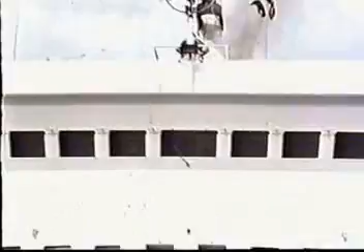These ships are the means of transportation of millions of people and goods of every kind between countries, and are therefore the lifeblood of trade between nations. This ship is one of the many engaged in this vital task, and the functioning of all its parts in unison is essential if its role is to be played efficiently.

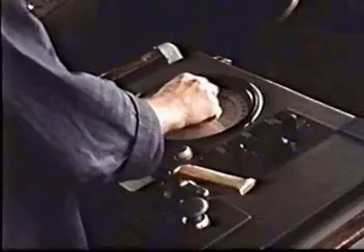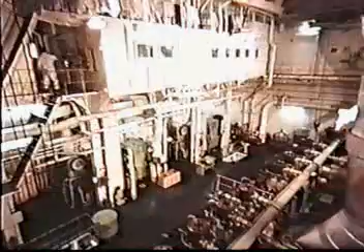As with people, no two ships are exactly alike. Although ships of the same class may be built to the same exacting specifications, they will not all meet the same conditions in use, and they will therefore acquire certain characteristics which will be particular to them. The power source is no exception to this, and depending upon the conditions it meets and the attention it receives, it will function either as it was designed to or below that standard.

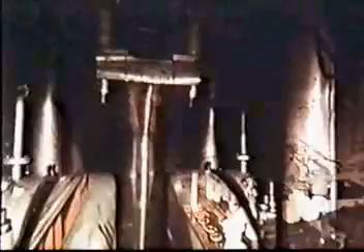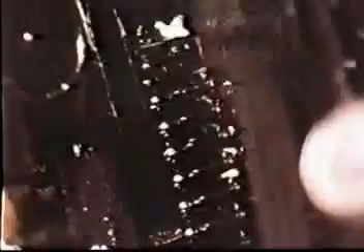One of the main factors in the correct functioning of the marine diesel engine is the quality and condition of the lubricating oil in the system. Correct treatment of engine crankcase oil helps to reduce wear of the engine parts. The life of an oil can be several years, but will yours last that long?

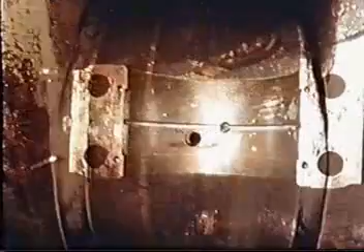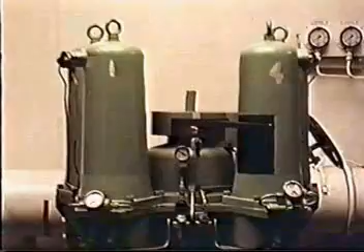Failure of adequate quantity and quality of lube oil can cause damage. To ensure this does not happen, we need to know the types of problems causing degradation of the oil, the steps necessary for prevention and treatment of contamination, and analysis of the oil's condition.

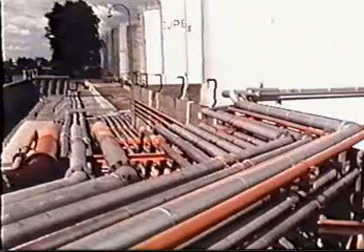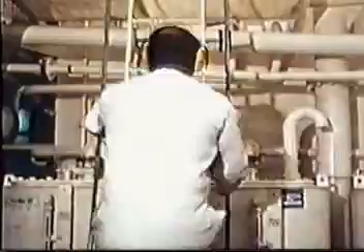When the oil is delivered to the ship, it will be in an on-spec condition. This is the standard to which the oil company has carefully produced the oil in order to meet the needs of a particular engine. Care needs to be taken with the oil in storage and handling. Even a little contamination will impair the quality of an oil and will in time take its toll in excessive engine wear. Following correct procedures will ensure that the oil is maintained in good condition.

Good housekeeping aboard ship is the key to efficient and effective lubrication. Ensure that you order enough for your needs. Check records of earlier voyages as a guide to consumption.

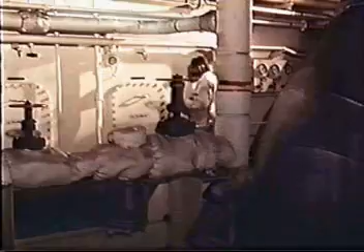Before delivery of the oil, the storage tanks should be inspected to make sure they're free of loose paint and rust.

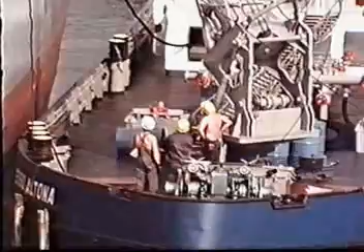Before loading begins, the filling line should be drained at the lowest point. If filling lines are used for more than one grade, they should be drained thoroughly, and shutoffs should be checked for leaks.

Tanks are subject to water contamination due to leakages around filling points, tank breathing, and incorrect venting at points of high humidity in the engine room.

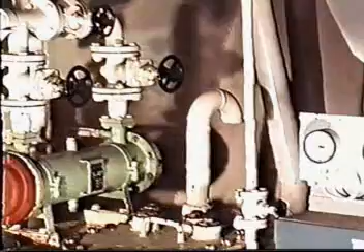Having ensured that the oil is in the best condition possible before use, let us look at the engine oil system itself. The oil in the system of a diesel engine serves both as a lubricant and coolant, carrying away heat from the bearings and other components.

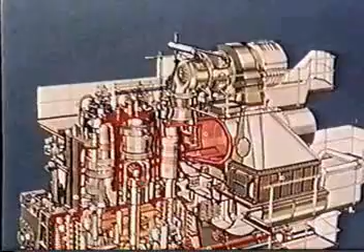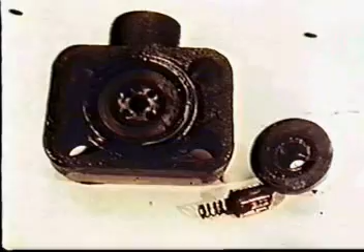Many oils have a range of additives which help to combat contamination. During normal operations, the crankcase oils become contaminated by carbon, metal, water, and dirt. The following problems are caused: excessive wear of cylinders, rings, and pistons, excessive deposits on pistons, valves, cylinders, and ports, crankcase corrosion, and bearing failures.

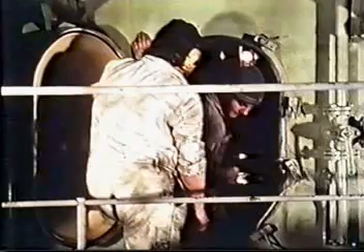The exact nature of the problem depends largely on the type of engine. Let us look first at the crosshead type of engine.

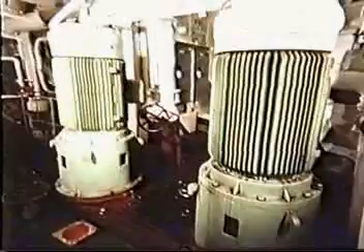All the working parts of a crosshead diesel engine, other than the pistons and cylinders, are served by the bearing oil circulation system. In a typical system, the lubricating oil circulating pump takes suction from a drain tank, sometimes through a gauze strainer, and delivers oil through an oil cooler and a filter to a gallery pipe. From here, the oil is distributed to various engine bearings, including the thrust block, and if applicable, to the piston cooling system.

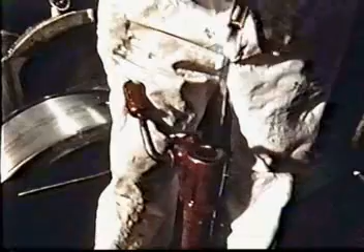Taking a sump reading at regular intervals is most important. A rise in the sump level indicates that external liquids are entering, and a drop in the level shows oil is being lost.

The first step in the removal of contaminants is static filtration. These filters are made out of a variety of materials, such as wire mesh, compressed paper, pleated fibre paper, felt, and plastic, and can be self-cleaning and self-flushing.

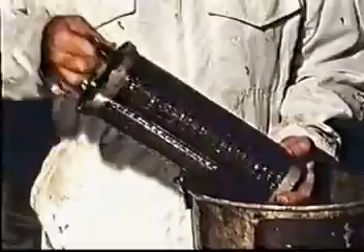Filters may get choked, and care must be taken to ensure there is no reduction in the oil flow to the engine. Engines have been starved due to blockages at filters.

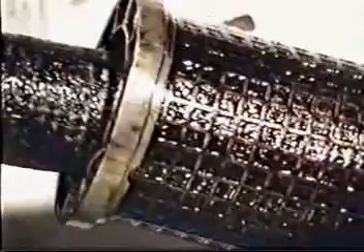Very fine filtration can be attained. Attention should be paid to the manufacturer's recommended running hours, and one's own experience of particular engines must be taken into account.

Strainers are used to take out large debris, rust and scale in full flow treatment. The coarse filters are fitted on the pump suctions. The fine filters of 0.02 to 0.04 millimeters are fitted on the discharge to the engine.

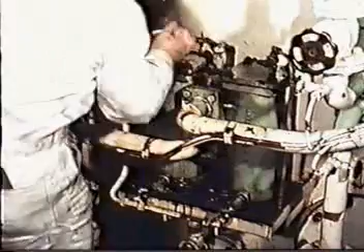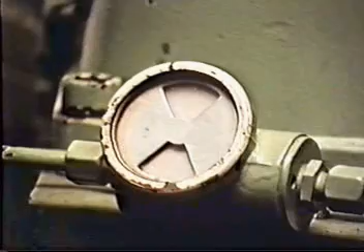These are used in bypass, as the volume of oil circulated is too great to enable these to be used in full flow treatment. Duplex or two-element type filters are used, so that one may be cleaned while the other is in service. A dual density element enables the combination of partial flow and full flow treatment in one filter element. Differential pressure gauges connected across the filters indicate when cleaning or removal of the element is required.

Some small filters are self-venting, but in the large discharge types, air can collect, and these are vented and piped to the engine crankcase or lubricating oil drain tank.

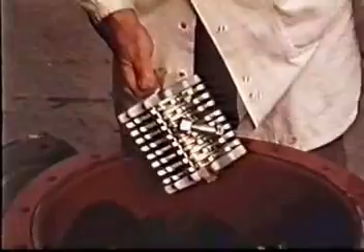Magnetic filters are sometimes used in bearing oil systems. The oil passes through filtering cages, and the ferrous metal is trapped by powerful magnets. Frequent inspection will show up any abnormal wear of magnetic engine parts.

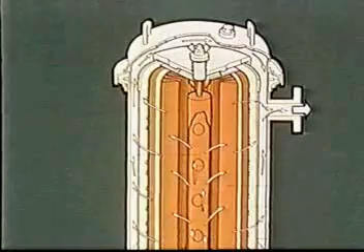Some filters combine a clarifying element with a coalescer, which removes all free water from the system. The dirty oil is forced through an inorganic fibre element, and the minute water droplets are coalesced into large droplets, which settle out by gravity to the bottom of the filter.

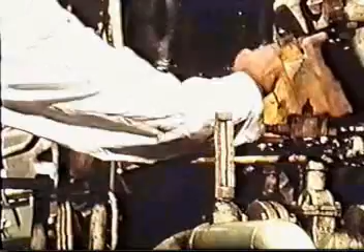Ensure you know what type of filters you have, how they operate, and how they are to be maintained. Refer to the manufacturer's manuals on board.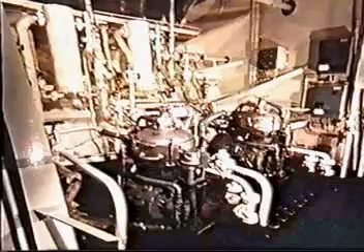Let's now look at the purification by centrifuging. This is the most widely used method for purifying diesel engine lubricating oils. The lube oil in the diesel engine sump tank is pumped via a preheater to the centrifugal separator and discharged back to the sump tank.

The oil is normally heated to about 80 degrees centigrade. Overheating will cause oxidizing of the oil. The capacity of the centrifuge doesn't allow full flow treatment of the oil.

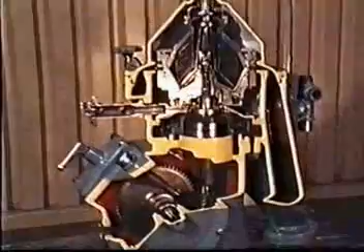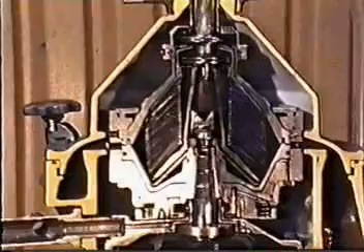This model of a separator shows the main components: a frame, a worm gear, a spindle, a bowl, and inlet and outlet ports.

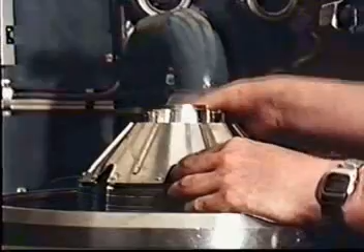The separator bowl consists of a bowl body and a hood held together by a lock ring, a distributor, top disc, wing insert disc, and a disc stack which consists of conical discs. The disc thicknesses are about 0.5 millimeters, and the separation channels, the distance between the discs, is about 0.6 millimeters.

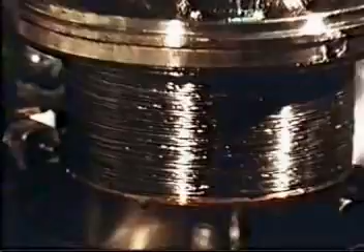Separation takes place between these discs. The space between the periphery of the bowl body and the disc stack acts as the sludge space for the particles separated from the oil.

In the purification process, the dirty oil is introduced into the bowl through the inlet. The oil is accelerated in the distributor to higher and higher rotational velocity, so that when the oil is introduced into the bowl at the periphery of the disc stack, it has almost the same velocity as the bowl itself. The water and solid particles are separated from the oil in the disc stack.

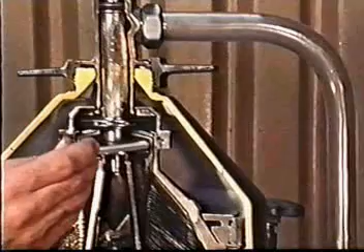The water flows continually through the channel formed by the bowl hood and the top disc, passes the gravity disc into an outlet chamber, from where it is discharged by means of a so-called paring disc. The particles are collected in the sludge space.

The purified oil is discharged through the oil outlet by means of a similar paring disc located in the oil outlet chamber.

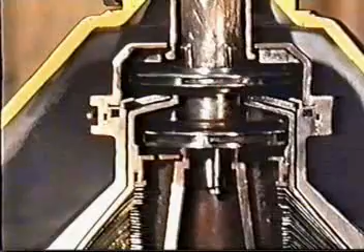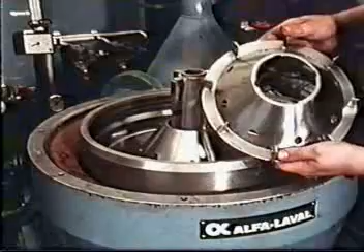The fluid velocity in the bowl increases as the distance from the center towards the periphery of the bowl increases. Thus, to prevent the occurrence of slips between water and oil at the interface, a special insert disc with wings is placed in the middle of the disc stack. The wings keep the water and oil rotating at the same angular velocity.

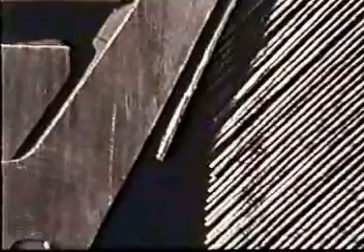This arrangement ensures the highest possible separation efficiency and also reduces the risk of emulsification between oil and water at the interface. Separation takes place in the disc stack, so its full area should be utilized. This is achieved by locating the interface, which is the division of oil and water, between the outer edges of the disc stack and the top disc.

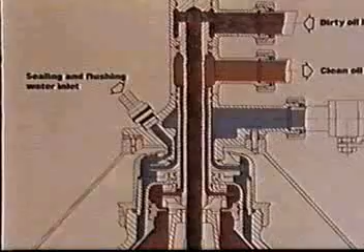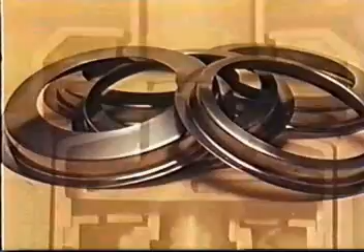Should the interface be located outside the edge of the top disc, the oil will escape through the water outlet. To prevent this, the bowl is filled to the edge of the interface with sealing water. The sealing water is forced against the periphery of the bowl, forming a liquid ring, the inner side of which acts as a liquid seal for the oil. The inner diameter of the gravity disc fitted onto the water outlet determines the location of the interface.

The separator can work either as a purifier or a clarifier. In the purifier, the water separating out to the sludge space is continuously discharged via the space between the top disc and the bowl hood. As a clarifier, this water outlet is closed and water separated out is collected in the sludge space.

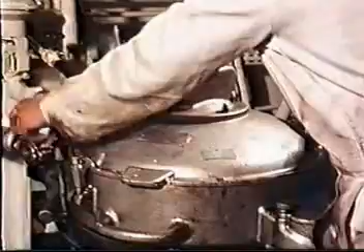Purification is recommended for marine lube oils due to the risk of water contamination. There are two basic types of separator: manually cleaned and self-cleaning.

Manual cleaning is by a solid wall bowl. The separator is intermittently operated, and when the sludge space is filled, the machine is stopped and emptied.

In the self-cleaning separator, the sludge ports in the bowl hood are revealed by a hydraulically operated sliding bowl bottom. Self-cleaning separators can be arranged for total or partial discharge. Most modern ships use partial discharge for economic reasons, resulting in less oil waste.

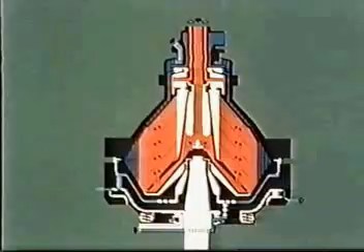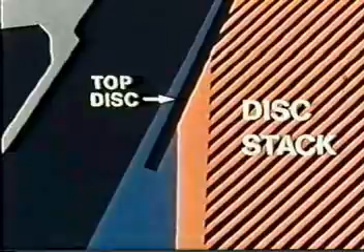Now let us look at separator performance and the points to watch to get good separation results. As stated, the interface between oil and water must be correctly positioned outside the disc stack in order to clean the oil satisfactorily. The interface will move from its correct position into the disc, resulting in bad separation, if there is a decrease in density, viscosity, or flow rate, or an increase in temperature.

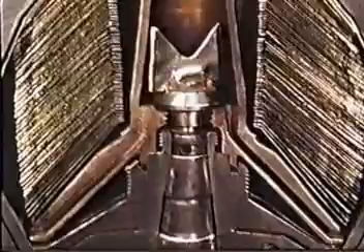The interface will again move from its correct position towards the periphery of the bowl, ultimately resulting in a broken water seal, if there is an increase in density, viscosity, or flow rate, or a decrease in temperature. A change in pressure drop over the disc stack will occur due to changes in flow rate, density, viscosity, or temperature.

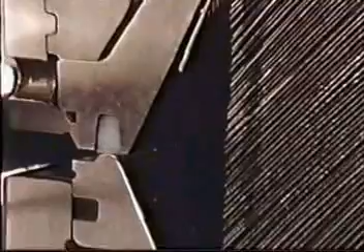In order to get the interface in the correct position for a good purification result, the following are important. First, the correct gravity disc must be fitted to suit the prevailing density, viscosity, and flow rate, and is chosen in accordance with the maker's instruction manual.

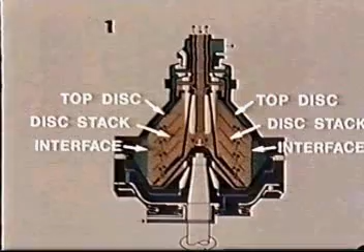A general rule of thumb is that the gravity disc having the biggest possible inner diameter that does not cause a broken water seal is the correct one. Secondly, the separator should be operated at the optimum throughput and at a constant separation temperature.

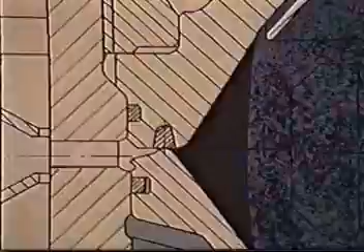And thirdly, the sludge space must not be overloaded, as then part of the disc stack may become blocked with a following reduction in separating area.

Local conditions must determine the most suitable running times between sludge removals, but experience has shown that anything between 1 and 4 hours gives satisfactory results.

Separators are rated for purifying diesel fuel oil. When treating straight-type lube oils, the separator should be operating at 35 to 45% of the nominal rated throughput. When treating detergent-type oils, the corresponding throughput is 20 to 25% of the rated throughput.

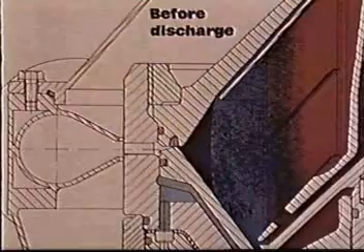The throughput should be adjusted to ensure minimum contamination in the total oil system. If run at a lower throughput than optimum, the oil leaving the centrifuge will be cleaner, but sludge content of the whole system will be higher due to the smaller amount of oil treated per hour.

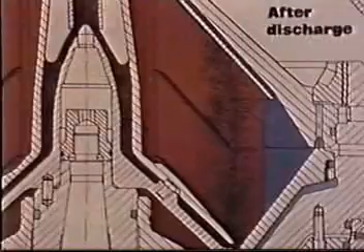If run higher than optimum, there will be a greater volume of treated oil, but it will be less clean, and so again, sludge content of the whole system will be higher.

It is recommended that the separator be operating at all times that the engine is running. When in port and the engine stopped, it is advantageous that the oil be passed through the separator at the slowest possible speed to take out smaller particles of contamination.

When opportunity allows, the complete oil charge should be pumped to a renovating tank, where it is heated and settled over 24 hours. After draining off the impurities, all the oil should be run back to the engine via the centrifuge as slowly as possible.

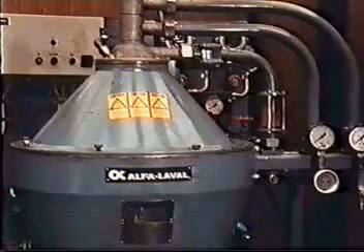The separator is subject to wear and tear and should be maintained and operated correctly to keep it functioning efficiently. It is installed to protect the engine, and if it does not function as designed, the final result will be bad separation, which will cause more wear and tear of the engine.

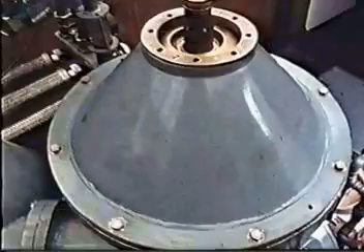In conjunction with static filtration and centrifuging, a routine analysis needs to be undertaken. This will monitor the condition of the oil, any changes in quality, and the effectiveness of the treatment applied. Analysis is a service provided by the oil companies.

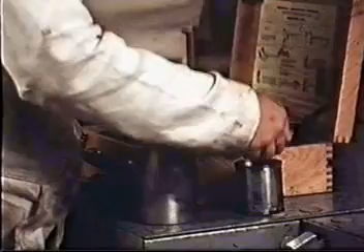For a more immediate indication of the oil condition, test kits can be used on board. Simple tests can give a useful analysis in a short time to check the alkalinity, dispersancy, contamination, viscosity, water content, total acid number, and total base number.

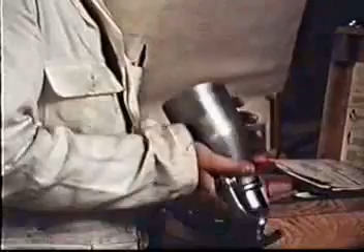Tests for water content should be carried out daily on board. As the result coming from the sample reflects the state of the whole oil, two essentials should be observed: that the sample is not contaminated during or after drawing, and that it is representative of the whole oil charge. Failure to observe these two points will result in misleading information.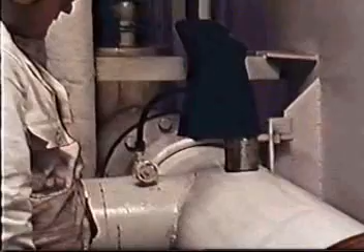In large engines, oil should have been in circulation for some time before the sample is taken, and about 5 litres of oil should be drawn off before filling the sample container. The oil should be hot when the sample is taken, and come from points before and after the centrifuge.

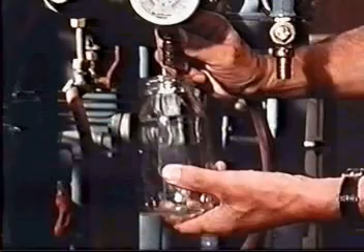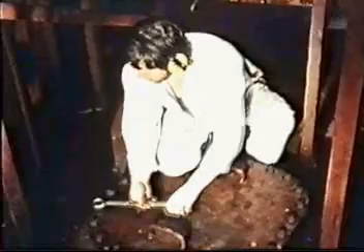A full shore laboratory analysis should be carried out every 3 to 6 months, unless there is suspected degradation. The figures obtained from such analysis when received on board should be checked with existing figures. In the case of an oil which is badly contaminated and is condemned, the sump must be opened up, examined, and cleaned prior to replenishing with new oil. In normal circumstances, the sump should be examined once a year.

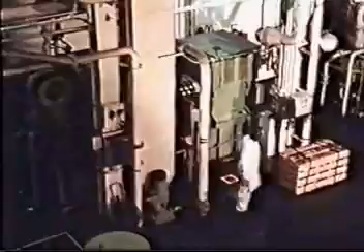We now look at the trunk piston engine, in which the pistons, as well as the bearings, are lubricated by the crankcase oil. Oil under pressure is fed to the main bearings and thence by way of drilled holes in the crankshaft to the big end bearings. From these, the oil is usually led by drillings in the connecting rods to the small end bearings. Then it goes to the piston cooling system.

Piston ring and cylinder lubrication is by splash from the crankcase. In some medium-speed trunk piston engines, lubrication of the pistons and cylinders is supplemented by means of separate cylinder lubrication.

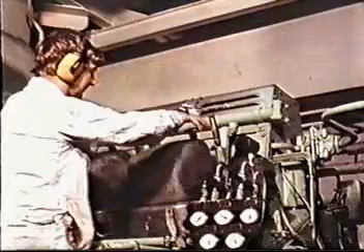Detergent oil is normally used in the systems of trunk piston engines. In the larger types, the oil is filtered and centrifuged in the same manner as for the crosshead type of engine. In the past, the oil in smaller engines was filtered, but not usually centrifuged. But due to the introduction of heavy fuel, the oil must now be both filtered and centrifuged.

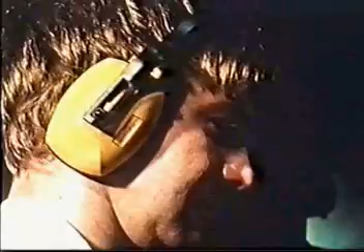The system charge is comparatively small and is renewed periodically as recommended by the engine manufacturer, or more frequently if found necessary due to abnormal contamination. Fuel dilution, the contamination of the lube oil by fuel leaking in the engine, is always a danger in trunk piston engines. The fuel injectors must be given proper attention to avoid leakage into the crankcase.

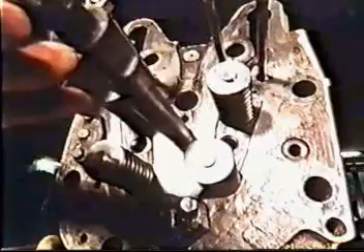If the oil flow through the engine is too low, the additives will be more rapidly depleted. Piston temperatures, oil consumption, and additive level are closely related factors. An apparent improvement or economy in one direction only could have a bad effect on the operation of the engine as a whole. Samples of lubricating oil are taken regularly.

For diesel engines, the samples are taken from the system of a low-speed engine and from the crankcase of a trunk piston engine. These samples are returned to the oil supplier for analysis. The sample should be forwarded in a suitable clean container and not in various glass bottles. Clear labelling, giving details of the source of the sample, the type of oil and total hours in use, should accompany the sample.

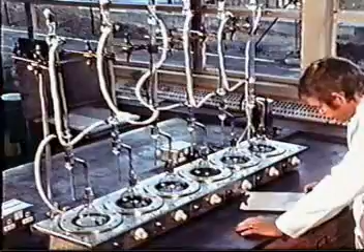Analysis of samples indicates the condition of the oil and whether it is fit for further service. The results should be assessed in relation to past analysis. The rate of change in quality is important. In analysis, the first question is obviously, is the oil usable or not? The second is, will the machinery continue to operate satisfactorily with this oil?

Several factors and possible contamination sources are considered. Take the change in viscosity, for example. It can be lowered by fuel dilution and raised by oxidation, contamination by cylinder sludge and heptane insolubles, that is, products of combustion or soot.

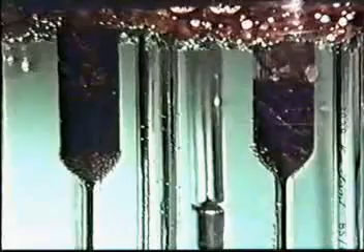Changes in viscosity have to be considered in relation to other test data, such as the total acid number, TAN, for oxidation, n-heptane, and water for contamination, closed flash point for dilution by light fuel and cleaning fluids. Change in viscosity index could even be due to mixing with other oils.

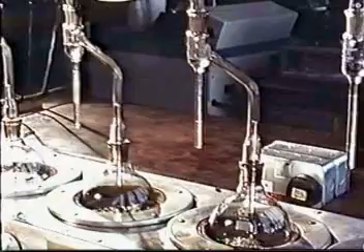Some other factors to consider. Water content, which can be from a leaking cooler, leaking liners, or condensation. Salt from seawater leakages can cause corrosion. Insolubles, sediment from oxidation, combustion, soot, wear debris, dust and grit from system pipelines. Flash point, lowered by fuel contamination. Total base number, TBN, alkalinity depletion by acids from combustion products and oxidation. Microbiological degradation.

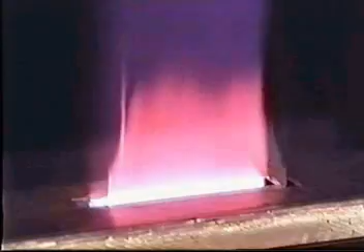Tests for these can define the condition of the oil and point to the action which needs to be taken. This may mean changing the oil or treating it in a particular way by settling and centrifuging.

When one considers the many tons of oil that may be in use in one engine oil system, it is clear that oil hygiene can lead to economic benefits and smoother running of the engine room. Wear of machinery will be greatly reduced, and there will be even more efficient engine operation. A diesel engine which is used and not abused will give many years of satisfactory service. Crankcase oil hygiene will contribute to the safe and efficient operation of your vessel.